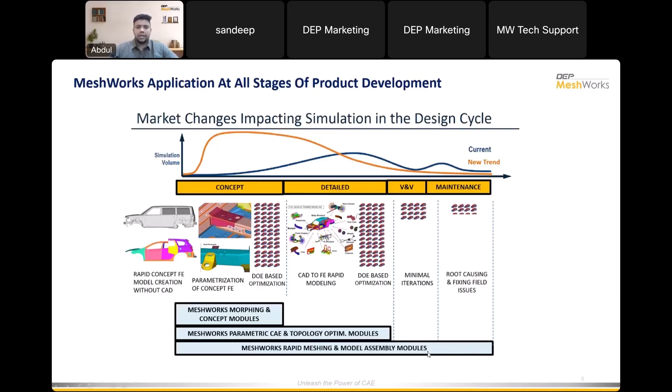This webinar has already been detailed in a past webinar about meshing and modeling activities, which you can see on our YouTube channel as well.

For today's main live demonstration, we'll show how one can achieve shape parameterization, bead parameterization, bulkhead parameterization, and doubler, rib, weld, and parametric optimization success stories, etc. All of this can be achieved with our fast design iterations.

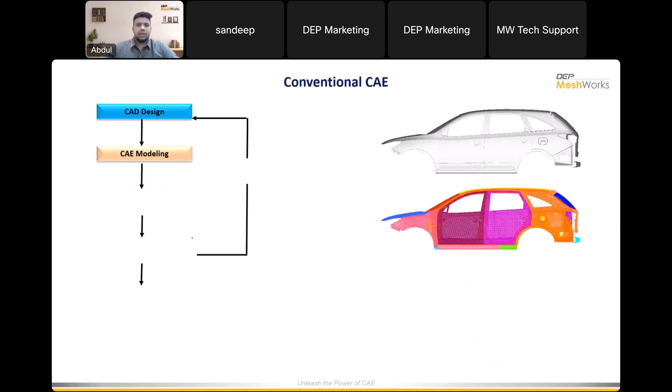With the conventional CAE approach, whatever you see in the market, one develops the design starting from the CAD design, then does the CAE modeling. From there we go for the analysis, and if the targets are met, we freeze the design. If not, we again go to the CAD design, make all the changes, and execute this entire workflow one more time.

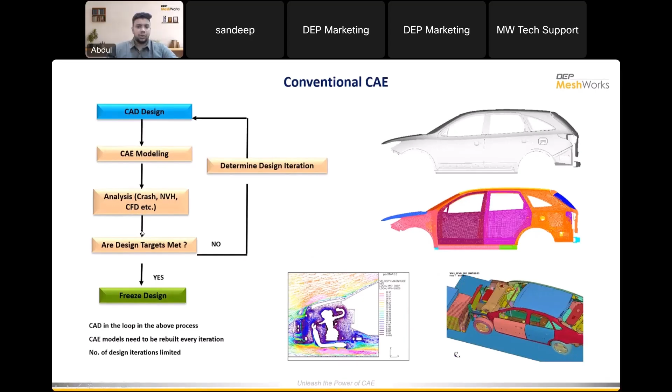But in the transformed CAE, or MeshWorks route, you can import your CAD model and do the meshing, etc. Instead, you can directly import our CAE model itself and do all the processes in the analysis stage.

If the design targets are not met, you can achieve the design targets by our parametric CAE approach and also DOE optimization approach. Not only do we do morphing and parameterization at the mesh level, we can also do CAD morphing level. So whether you have a CAD or a mesh, anything is fine, we can do that.

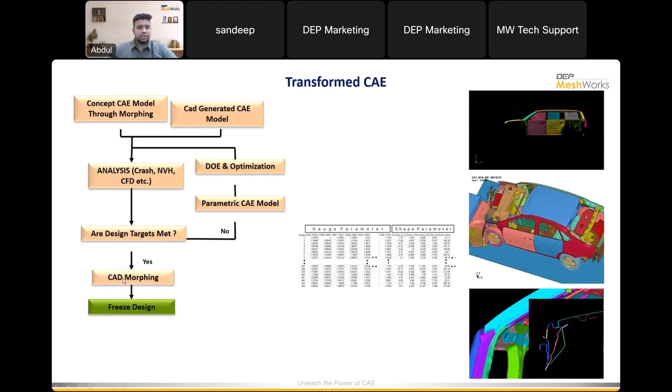One more advantage here is that whatever modification you do at the mesh level can be imposed directly into the CAD level as well. That is also one main criteria in our transformed CAE approach.

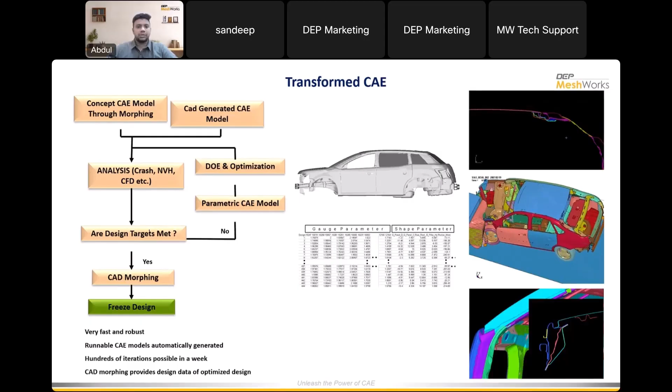So here the whole nine yards of meshing and modeling activities has been completely eliminated. And also with our new ROM capability, this kind of approach gives more hands for the user.

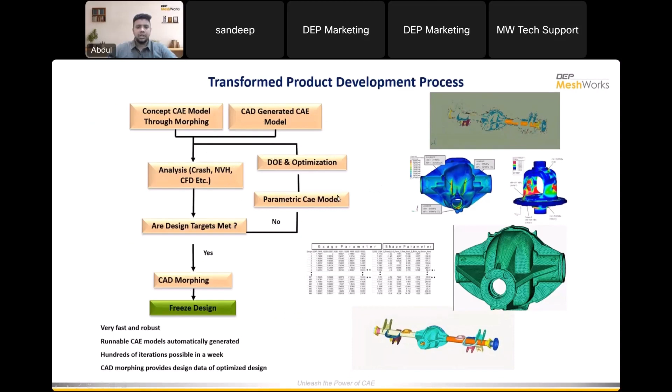We do that at an assembly level and also component level, or any sub-assembly level of optimization also, okay, with a similar approach.

In this kind of parameterization and optimization, one can achieve fast design iterations. These verticals of parameters can be obtained in MeshWorks, starting from shape parameters, where one can do any kind of shape modifications on the model or geometrical changes, and then we can play with the material and also the type of material and also the gauge, which is

the thickness of the model, and also weld as a parameter, where multiple numbers of welds can be reduced or increased, or the material of the welds, etc. can be parameterized, and adhesives as a parameter, and some feature parameters like beads, bulkheads, darts, etc.

That is also what you will be seeing in the live demo today, and also some special parameters like part extension, etc.

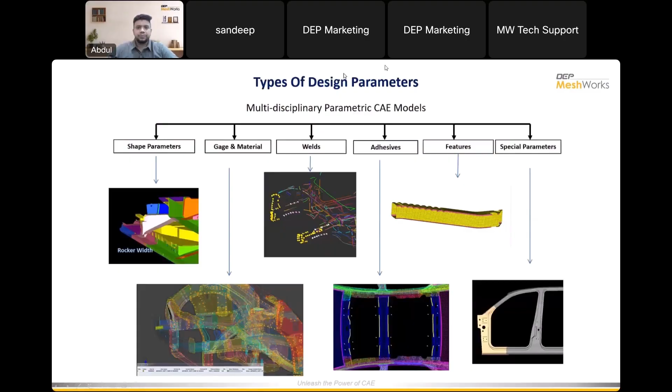Now we are going for the live demo. We are seeing shape parameters first. So in the parameterization panel, we have shape parameters, and in shape parameters we have multiple options.

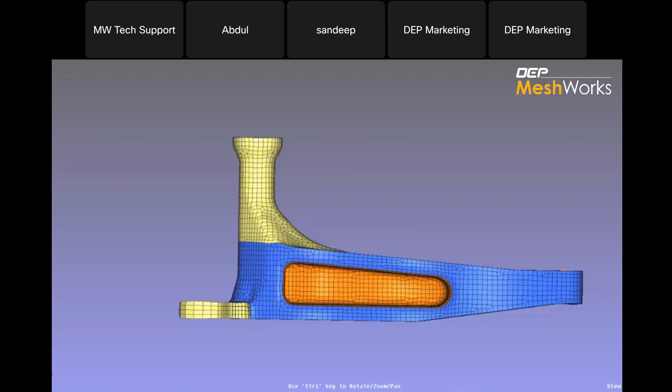So for a shape parameter, we need a morph setup. We'll create a morph setup first, for translate. I'll select this as my control nodes. And I have given two layers for deformation. And I have created a morph set.

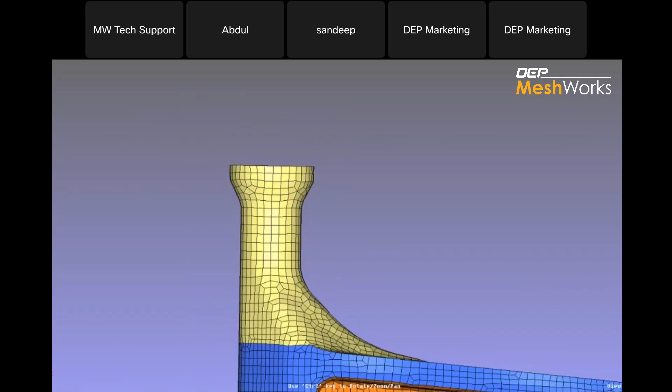Now I'll go for shape parameters, and translate. I'll select my morph setup here. I'll give direction as upwards, so we can move these elements in the upper direction. I'll set my value. I'll save this parameter here.

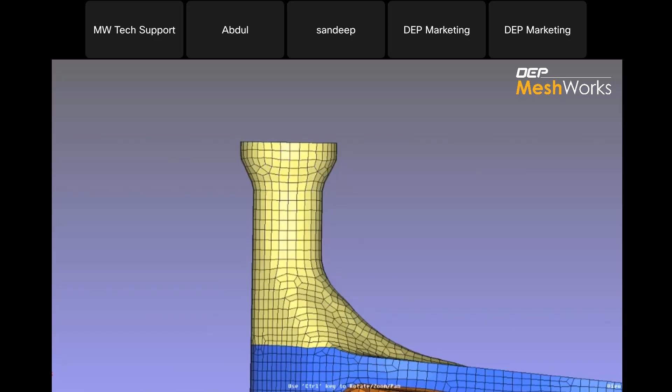So I'll go for review. You can see the translate parameter. Here I'm scrolling down, so it's decreasing, and I'm scrolling up, so it's increasing the length. You can see these features also have been captured. So in this way we can do the translate parameter in shape parameters.

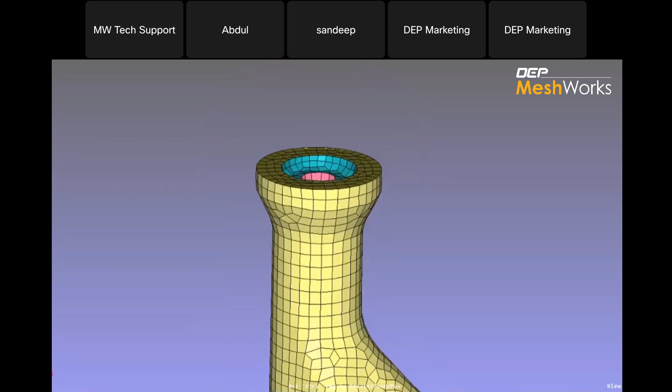Now we'll do one offset parameter. I'll create an offset for that.

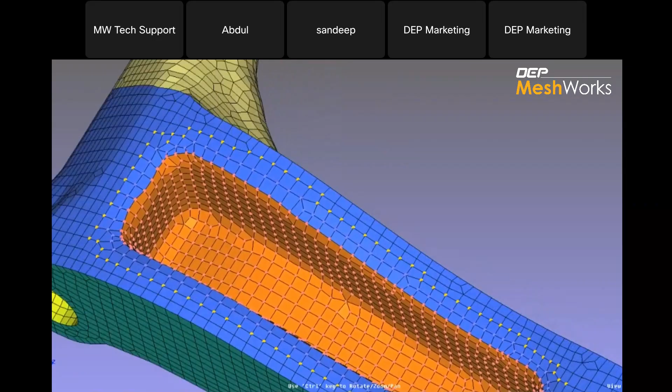So now I'll go for offset. Here you can see our offset parameter, how nicely it's offsetting the elements in this particular region. So in this way, one can create parameters by using MeshWorks in the shape parameters.

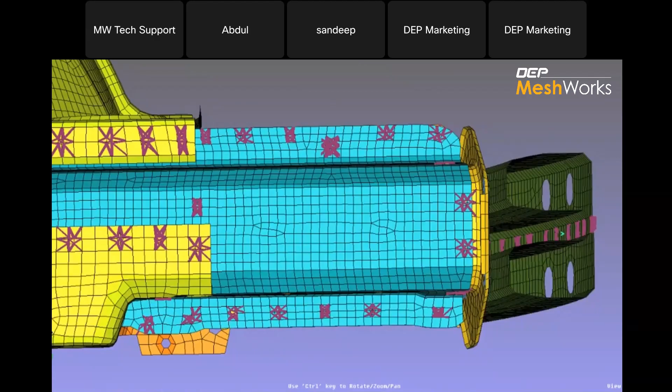Now we'll go for some of the feature parameters. In that we have multiple features. First we'll see bead, we have bead parameter here. We'll first select the component. We can create a bead as a new feature, and from an existing feature too.

We'll see new feature, so we'll select the base component. I'll select the length of the bead, and these are some bead inputs. Here we have bead type, 4 types here. And in dome type we have curve and linear.

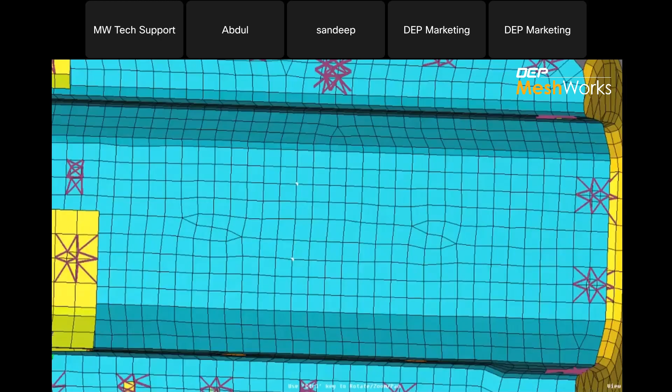So we can preview our bead, and I will click on accept. So we create beads for the stiffness of the component. If we want more stiffness, we can create parameters for these beads.

So in parameters, I will go for number of beads. And as it's in x-axis, I will take x-axis and the negative direction, so I can create my parameters in opposite direction. I'll go for a range of 100 or maybe 200.

I will define my bead parameters here. So after previewing, you can see we have got 3, as our range is more, it extended.

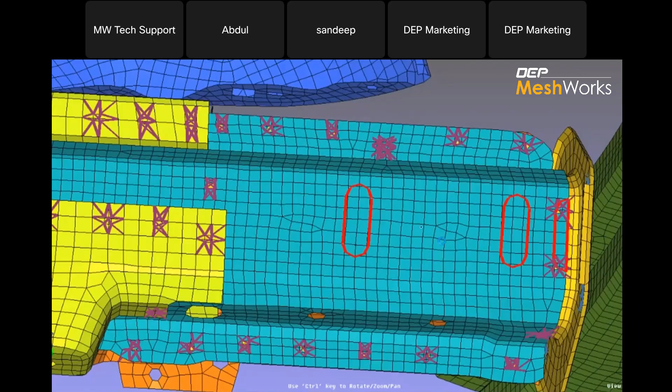So after preview beads, we can preview 3 beads here. In this way, you can save this and you can review that. You can review those here. I will take 2 beads, so you can see 2 beads here. Preview beads. So in this way, we can create beads.

And now we'll see another one, which is a bulkhead parameter. For creating bulkhead, I will select components, 3 components.

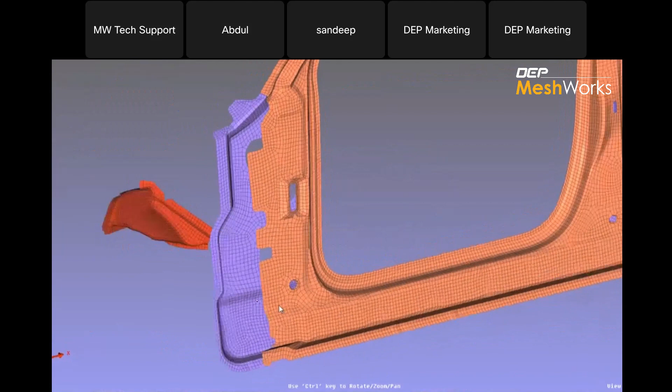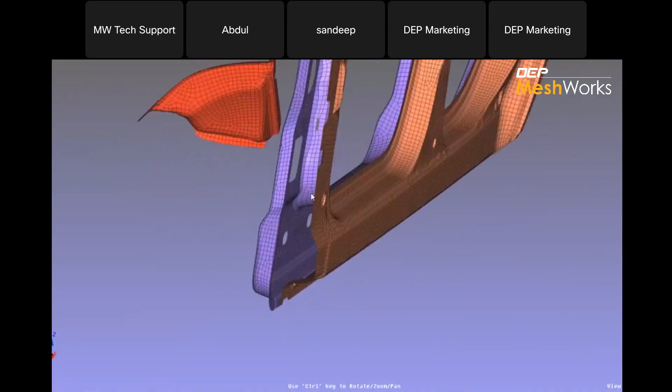So we have bulkhead parameter here. I'll go for create, specify geometry. For creating bulkhead, we have 2 types: between 2 channels and in a single channel. I want to have stiffness for these 2 channels, so I will create a bulkhead in between this. I'll select this as my upper channel and this as my lower, and I'll go for create plane.

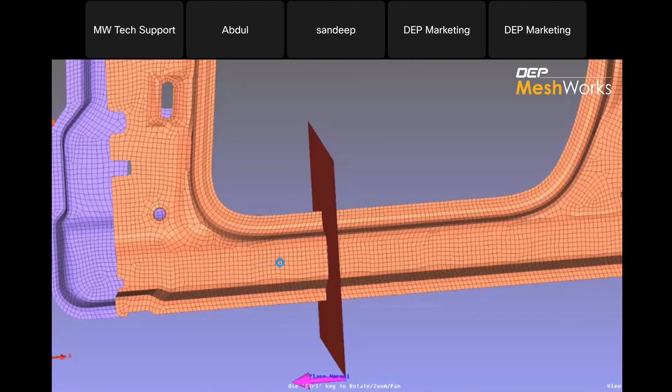I'll give the plane size and I have selected the center node. So now I'll click on create. You can see a bulkhead has been created here. And if you see here, we have connections also.

The connection at the upper channel is with spot weld and adhesives. The same way we have a connection for spot weld and adhesives for the lower channel also. Now I'll go for specify property. I'll select this component for the property of bulkhead. Accept, now I'll specify my connections.

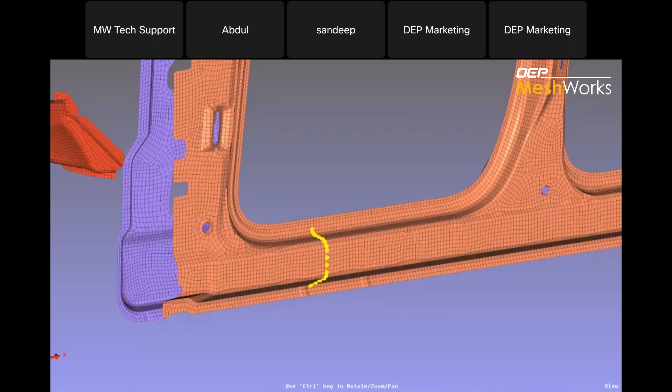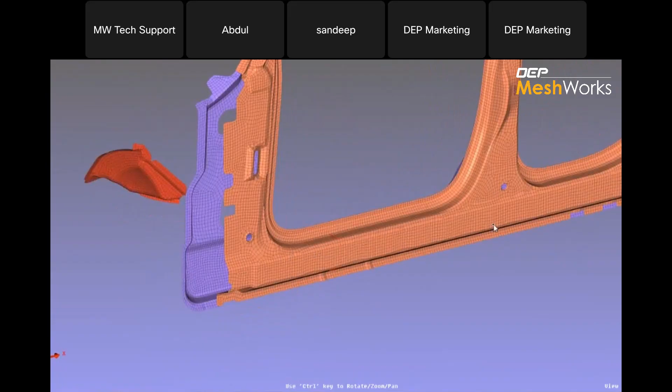And after previewing welds, we can see welds have been created here for that particular bulkhead. And I'll click on accept. If I want more bulkheads for more stiffness of this component, we can do the parameterization.

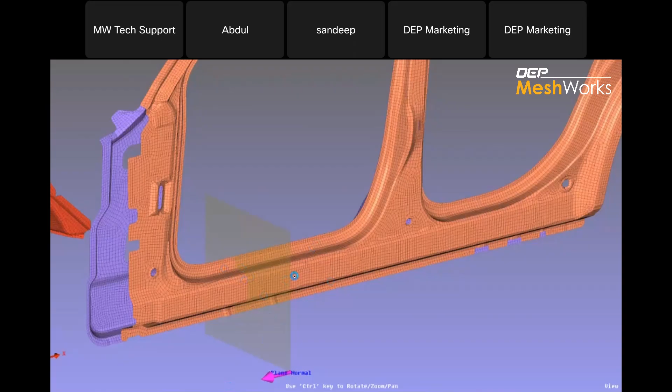So in parameters, I will go for number of bulkheads. I want 2, so I will give 1 to 2 max and current to 2. After clicking on preview geometry, we will get 2 bulkheads here. So you can see we got 2 bulkheads with a range of 100 mm distance.

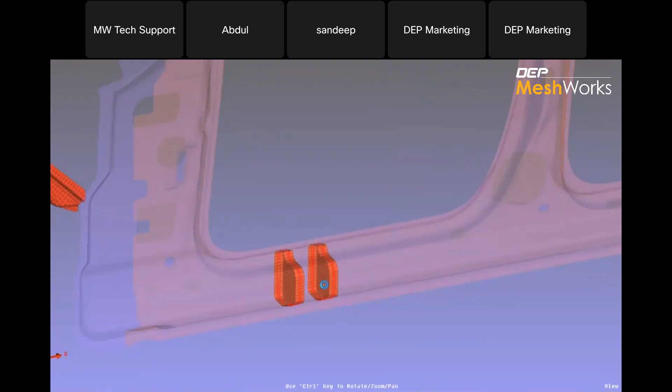So if you want, you can change the direction of bulkheads also. After clicking on preview with connections, we'll get connections for these bulkheads with welds. So you can see here we got connections. So you can save this, and in the same manner you can review those also here.

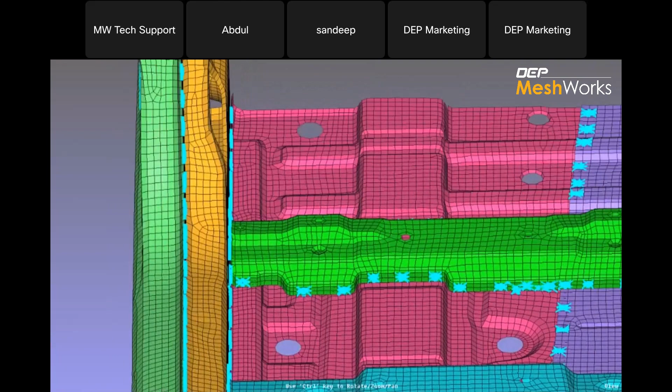So now we'll see one of our feature parameters, which is the doubler parameter here. Doubler also we'll use for stiffness, it's just like a bulkhead. I'll create a doubler here for this particular component. As I have selected the elements, I will restore them, and I'll create a plane.

So my plane has been created here. Now we have create doubler in 2 types: along master normal and reverse master normal, and these are the doubler inputs. And here we have weld line inputs also.

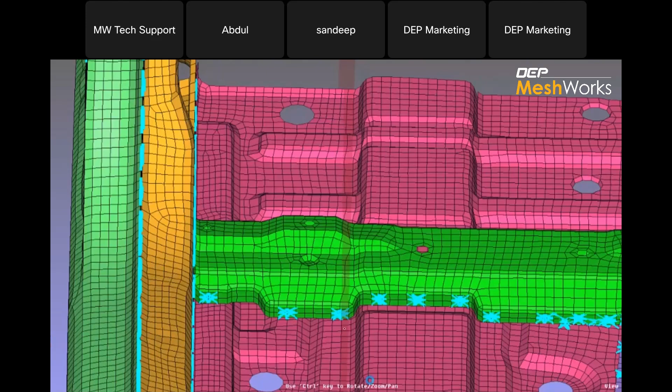For creating weld lines we have 2 methods, and I will click on preview. Now you can see our doubler has been previewed here, and I will click on accept. Doubler geometry created. Now I'll specify the property for this doubler.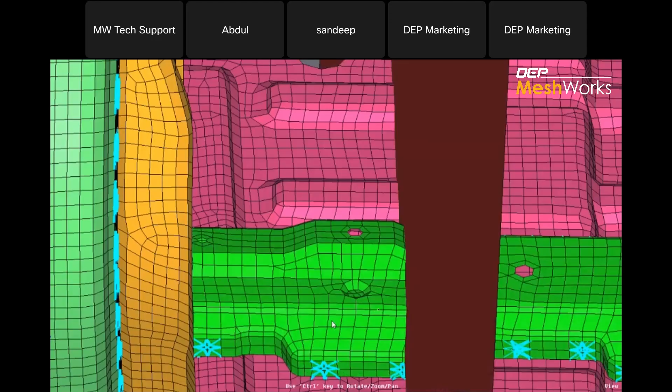I'll select this component. Now I'll specify the connections. I'll go for in spot welds, we have 4 types. We have seen in bulkhead also. So I'll go with at co-created lines.

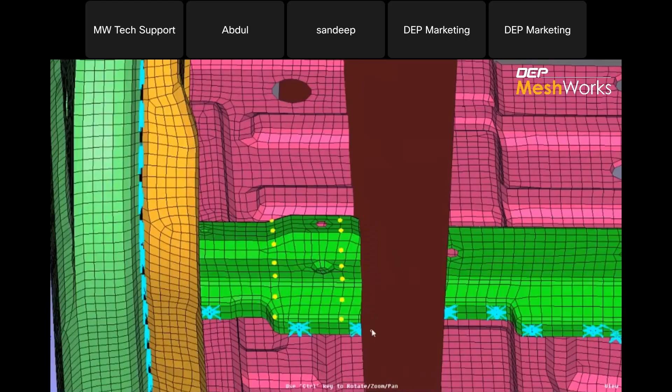I will select this as my connecting part and I'll click on preview. It says one component specified as connecting parts. You can see our weld points here, and after clicking on preview welds we got our welds here. I'll click on accept. So we have created one doubler with welds.

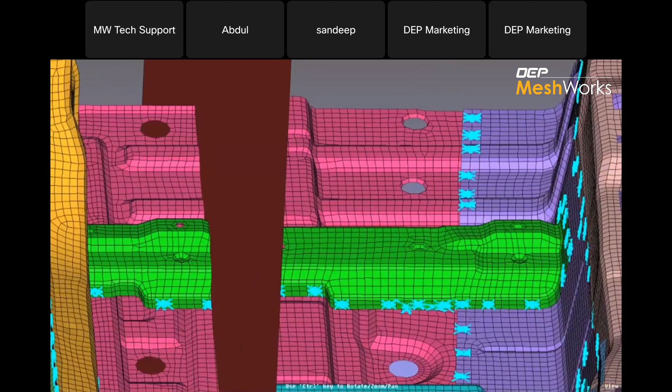Now if I want more stiffness for this component and more number of doublers, I will create a parameterization for that. I'll go for number of doublers and the range of 300.

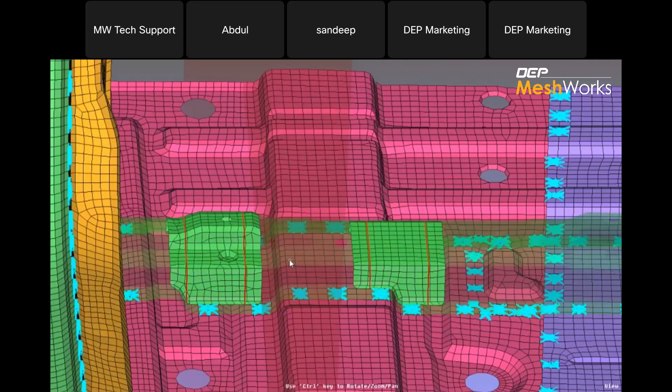If I give positive, it will come in this direction. I will give negative, so I can get a doubler here. I want 2 doublers, go for negative. So you can see we got 2 doublers with connections.

You can save this and you can review this here in review panel. So in this way we can create number of doublers for our stiffness.

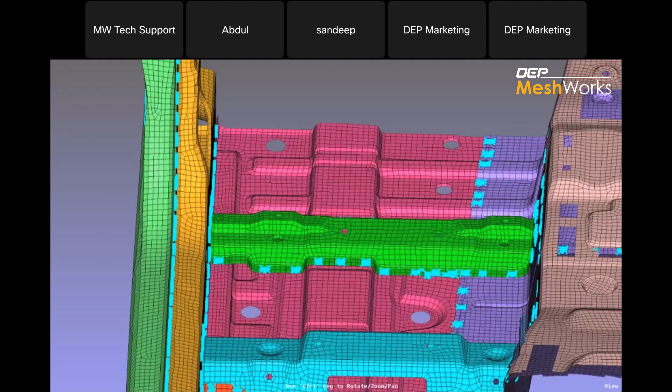Now we will see our tet rib parameter for the solid ones. So in parameterization we have a tet rib parameter. For creating tet rib we need a 2D component. So I have internally created this 2D component by taking face of this solid one.

So I'll select my 2D and I need to define my plane where I need to create my tet rib. I'll select my plane and I need to select a center node. So our plane has been created here.

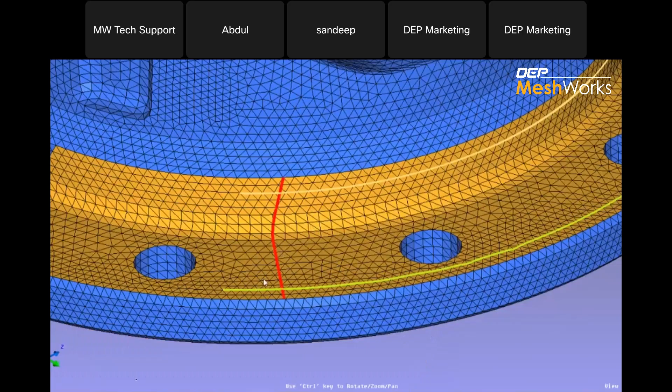So I need to select the trajectory, in which direction our tet rib should generate. I'll select my trajectory. I'll sketch my array by selecting my endpoints. As we have entered 4 here, we got 4 intermediate points.

You can modify this curve by just clicking on those points. Accept.

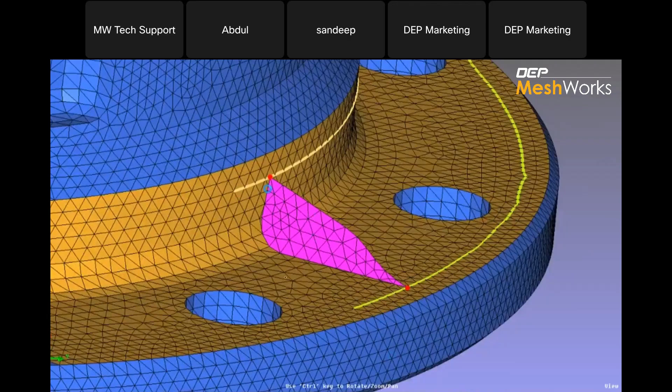As we need a solid tet rib, I have checked on this convert to solid rib, and user can create a fillet too. So I'll click on preview rib profile. Now we got a 2D rib profile here, and when I click on tet rib preview tet rib, we'll get a 3D tet rib here with the fillet.

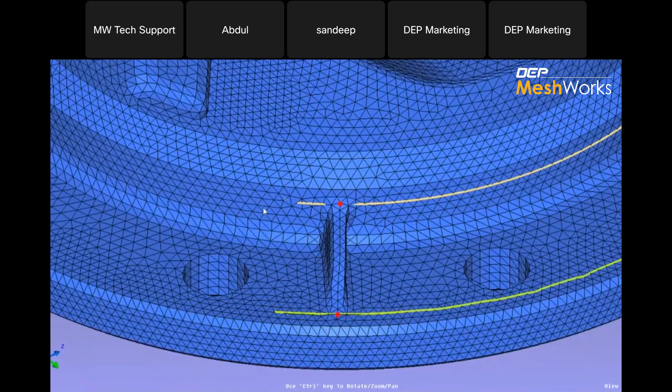And if user wants to remesh the fillet, he can remesh the fillet by using remesh fillet option here. So you can see here we got a tetrip with this property of the base component, and I will click on accept.

So if I want more tetrips in this circular path, I'll go for parameterization. In here we have pattern methods, 3 pattern methods. As it's a circular one, I will go for circular.

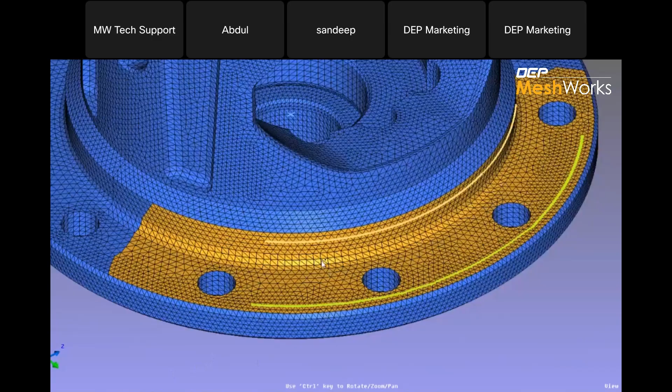And we need to specify a center. I have a center node here for the circular path. I'll click on that and I have defined my pitch value 36. It's an angle of tetrip.

So I need 2 tetrips. I'll click on preview rib profile. So the same way we have got 2 rib profiles here.

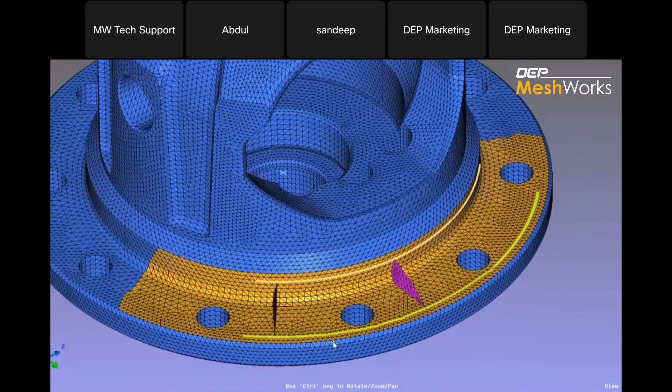If I go for 3, we'll get 3 ribs here. So you can see we got 3 ribs, and after clicking on preview ribs we'll get 3 tetrips here.

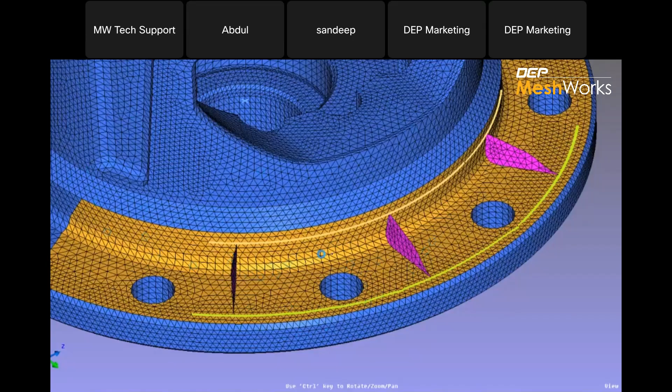So user can create a tetrip for the whole component in a circular way by using this tetrip parameter. Here you can see we got 3 tetrips as we have mentioned 3 as maximum, and you can save this,

and in the same manner we can review this one. If I click a 2 here, we'll get 2 ribs, and if we click on 3, we'll get a 3.

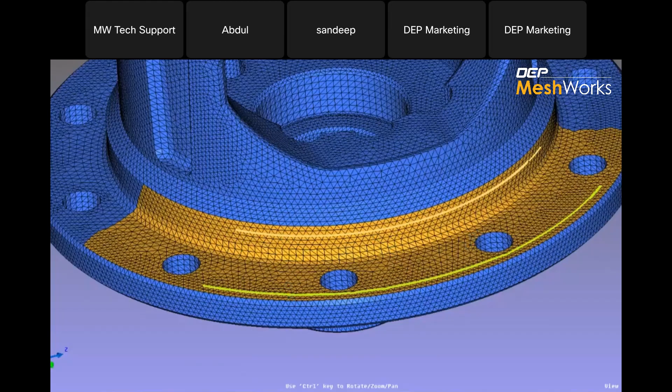So now we'll see one of our parameters, which is a weld parameter. Here we have weld lines here. So we'll create a weld parameter on this. We'll go for weld parameter.

I'll select these weld lines, and here we can repitch. We have repitch options here, so we can use pitch percentage, pitch absolute value, number of welds and all. So I'll go for number of welds. My minimum will be 5 and my maximum will be 75 welds for this particular lines.

So I will give parameter name as weld, and I'll click on accept. So if user wants the diameter, he can change the diameter. We have 3 options here.

And if the user wants heat affected zones, he can click on this. Now we'll review our weld parameter.

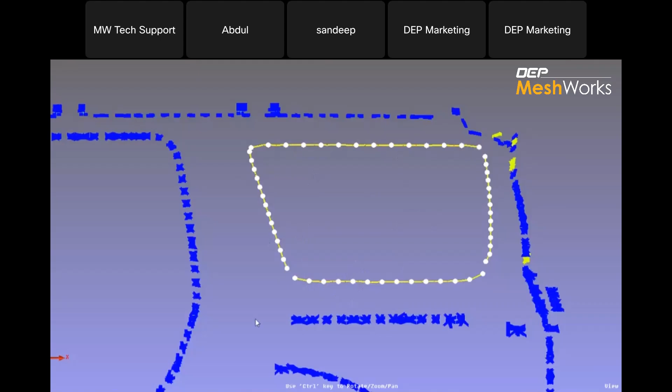Here you can see increment we can give as 5, 8, or 10. Now I have given increment as 5, and you can see our welds have increased. And if I click on negative, it's reducing. So in this way, we can increase and decrease the welds by using parameterization from the maximum and minimum inputs we have given.

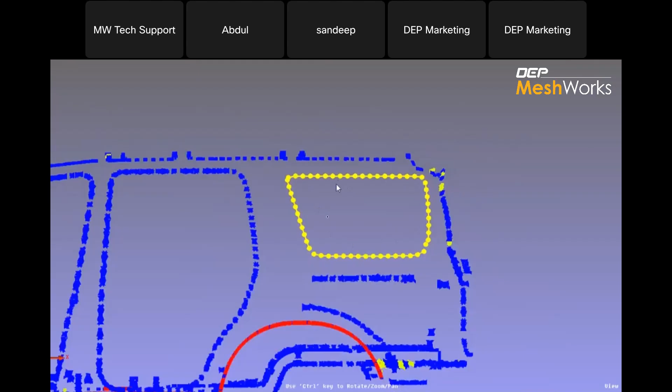So in this way, we can use parameterization in MeshWorks for creating multiple parameters. So now I'll hand over this test to Abdul.

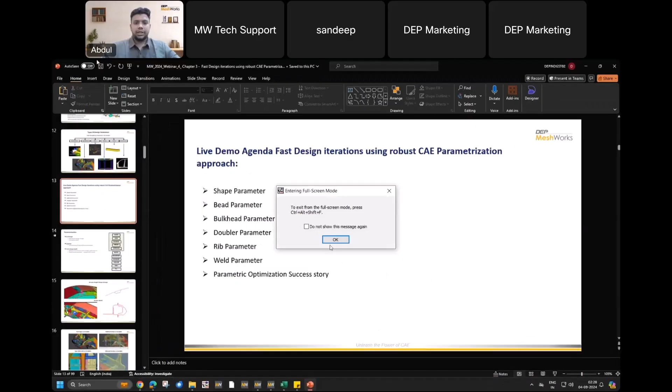So you have all seen the live demos for our fast design iterations with our CAE parameterization techniques, for each and every functionality of shape parameterization, be it bead, bulkhead, doubler, rib, weld, etc. So with these, one can parameterize the model, and I also have some success stories to share.

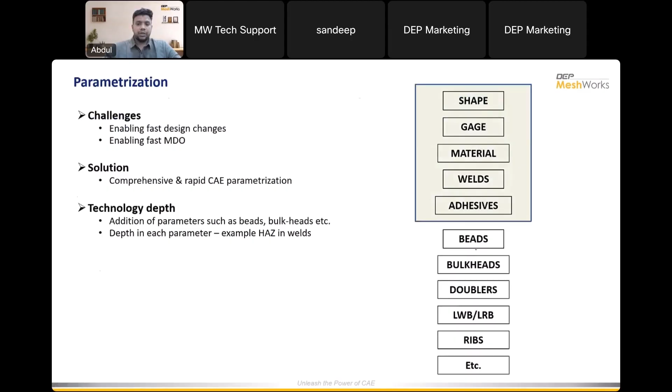With parameterization, as we all know, one can parameterize the shape. But in MeshWorks, we can also do this with thickness, materials, welds, adhesives, etc. Apart from that, some very unique functionality is our design enabler functionalities, where we address beads, bulkheads, doublers, etc.

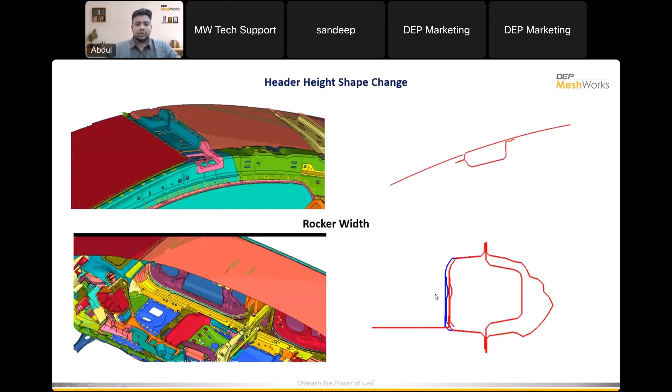And from there, as you have seen, our shape parameterization parameterizes the entire model with this kind of minimum and maximum criteria, with header height change, rocker width, or any kind of model cut and stitch, and do the parameterization in some of the local portions or at the assembly level. So the possibilities are numerous, especially when it comes to thickness, material, and welds.

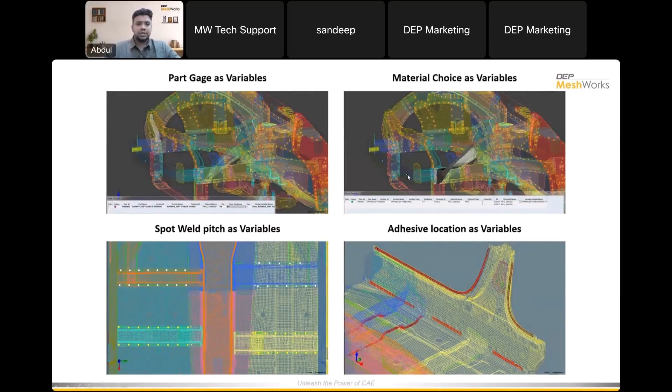These are all very unique ways of doing parameterization in the CAE world, and I would also like to touch on the extensiveness of design enablers, starting from bulkhead. When you create a bulkhead as a stiffener, either for side impact or some other stiffener component, if you want to increase the material strength, you can include the bulkhead.

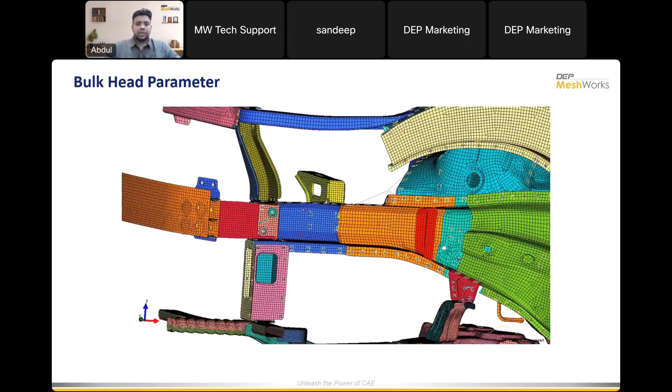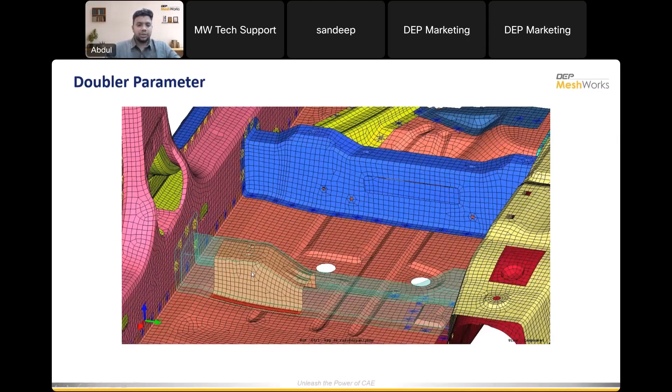So these cross members, if we wanted to strengthen them with doublers, we can do the length as a parameter, or number of doublers also as a parameter. That much variation we can do with the parameterization technique.

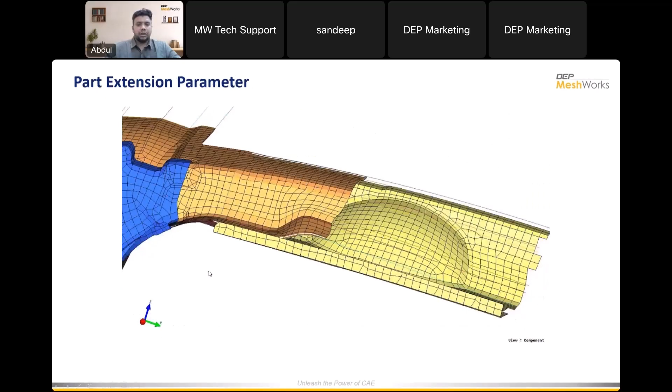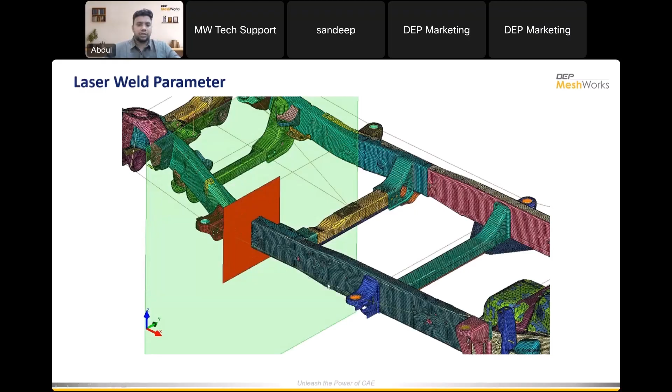And also we do everything with connections, and with all this, some unique parameterization like part extension parameter and part contraction parameter. And if you want to reduce weight in the model, we have our punch hole parameter and Tailor welded blanks, like our laser welding parameters for different material fusions throughout the geometry on the load path members.

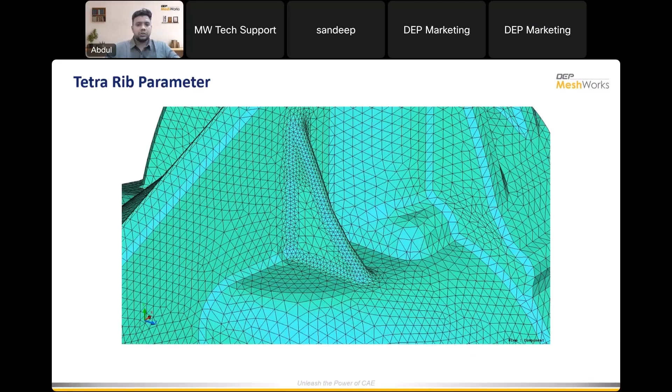And also, not only in sheet metals, but we also have it in tetra models, the rib parameterization, which I also showed, and some topology parameter which you haven't seen in the demo, which lets you relocate an existing member to a different location with all the existing welds, and the shape deforms based on the new location as well.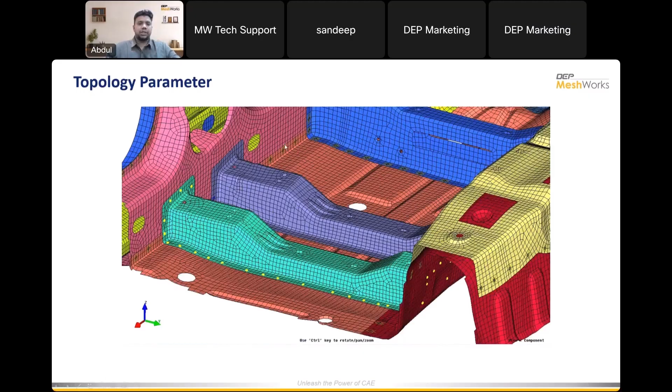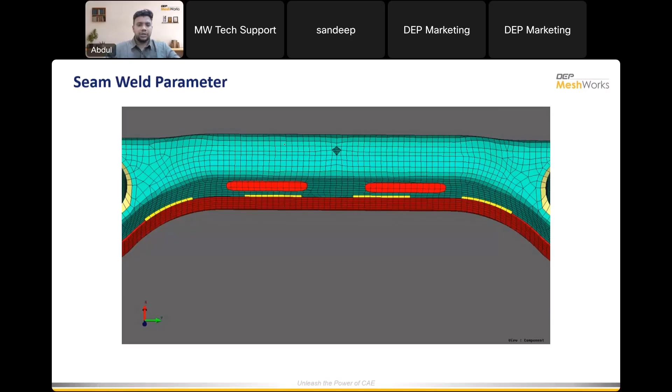And rib parameterization at the shell level, and also welds as parameters, like number of welds in particular gaps, and length as a parameter, etc. So these are all the parameterization capabilities in MeshWorks.

One can impose these parameters in one model, and also replicate the same into all the different verticals. Like if the user has an Abaqus model and has all these parameters ready, he can impose those parameters into Crash, NVH, and CFD in MeshWorks.

So with MeshWorks, one can optimize different verticals of models with various numbers of design iterations by just generating multiple designs across each domain. And from there, we do our optimization technique with the help of an optimizer.

So when we create an input-output matrix table, we just send it to the optimizer, like Isight or modeFRONTIER, etc. And from there we get our optimized design with the response of that calculation. So this is how we do our MDO with this approach.

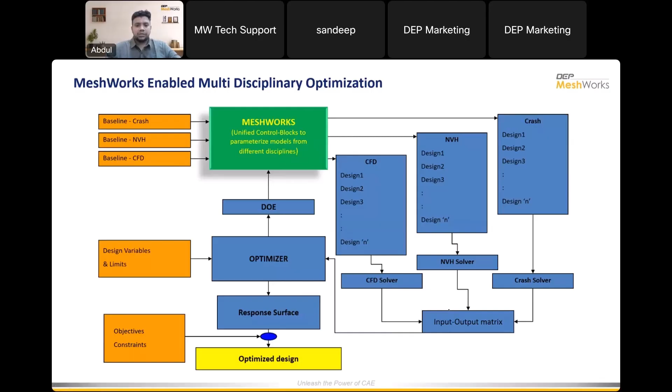With the help of MDO technique and parameterization technique, we have achieved a lot of success stories, which we wanted to showcase in today's session.

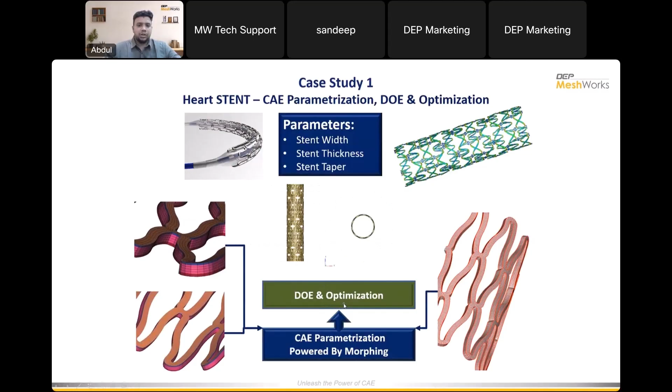Case study one is on the stent model, a cardiovascular stent, which is at a very micron level. We have done an extensive DOE optimization on this model with stent thickness and taper, etc. The model setup has been reduced from weeks to days, with hundreds of design alternatives, wide varieties of possibility, and a quality and robust way of simulation. So we have optimized results for this stent model.

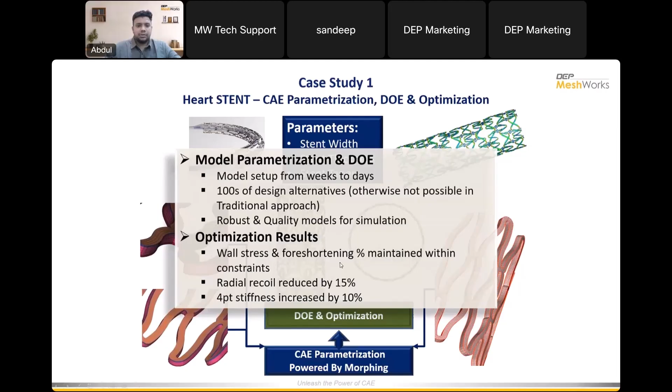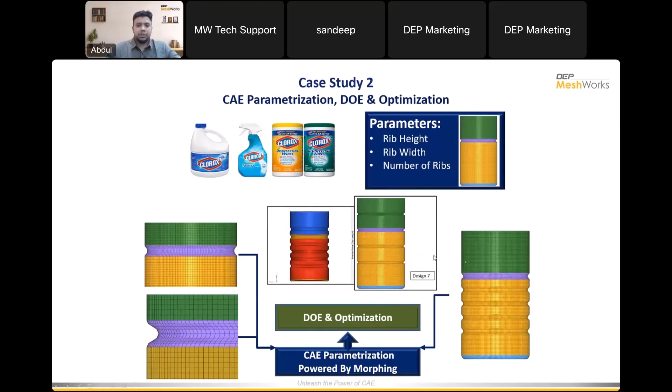For case study two, on multiple parts stacking in the logistics industry, we included bottle optimization, addressing how one can stack up multiple parts one by one, so that the bottom one needs more strength compared to the top. This is all addressed with loading capacity optimization. With that, the top load capacity has been increased by 20% more than usual loading capacity. That is one of the success stories.

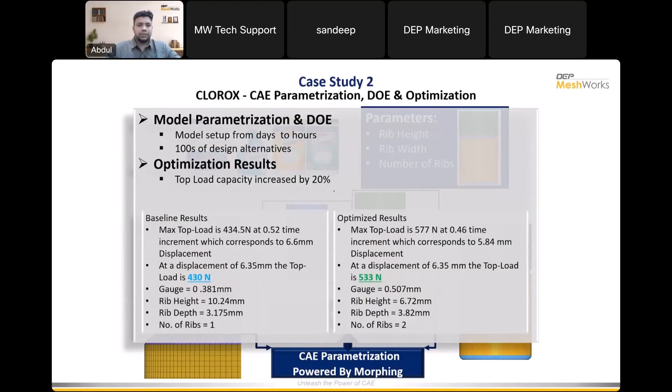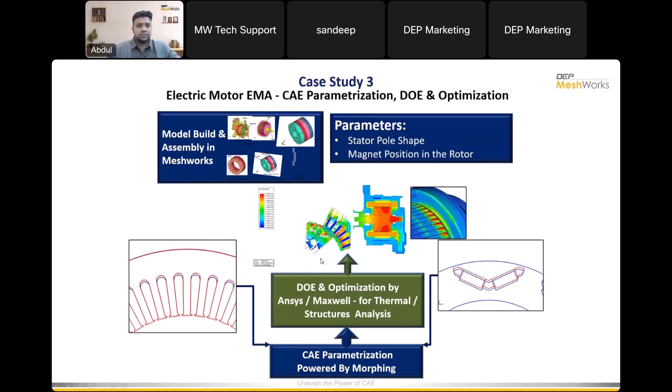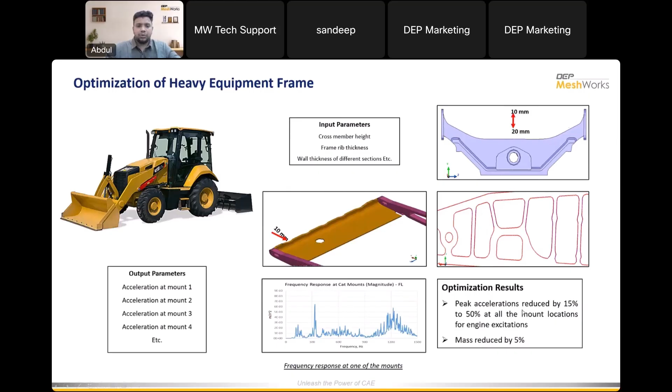One more optimization success story is on a particular mount of a heavy industry frame, where we reduced 10mm to 20mm variations across shape parameters and width of cross-sectional profiles. It performs the same, but we increase performance and also reduce weight, so overall mass reduction has been achieved to 5% in this model.

This is one of the success stories for a small car development in a US program, where the baseline structure is 233 kgs in DEP. With design changes and our parametric capabilities, we decreased a lot of weight, which is a great achievement, from 233 to 175 kgs, a 25% weight reduction in the model, which is very huge in the automotive industry.

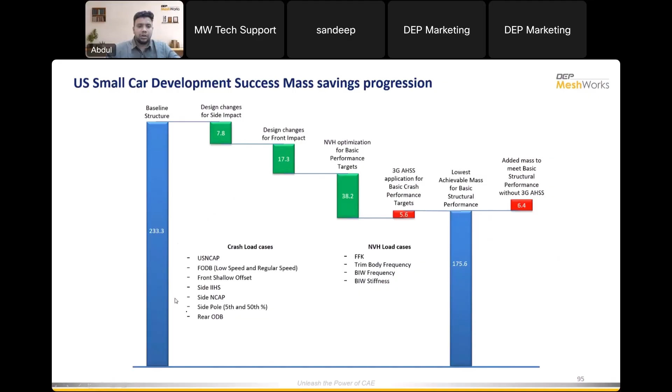And this was done while considering all crash load cases and NVH load cases into the picture.

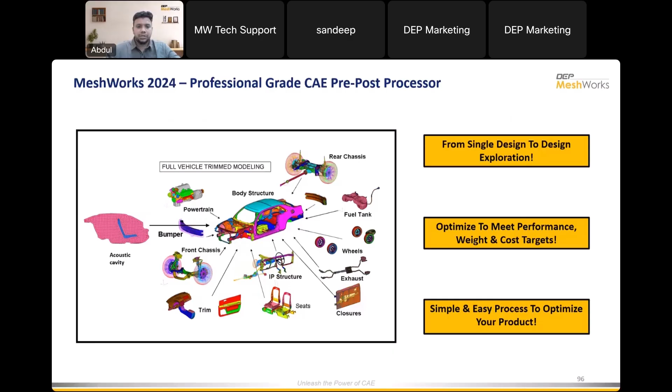Overall, as a CAE pre and post processor, when it comes to fast design iterations using our parametric approach, one can do multiple design explorations with a single design, meeting performance with weight and cost reductions as targets. It is a very easy and effective way of doing optimization, a proven approach.

At last, overall, as MeshWorks, I wanted to conclude this session with our 4 verticals of domains, where we transform all the CAE and CAD domains of workflows, and accelerate the CAE processes into multiple new inventions.

With ROM module as an example, with multidisciplinary optimization included into it, which saves a lot of time and cost, we innovate a new module, our eMod technology, which has been integrated into MeshWorks recently.

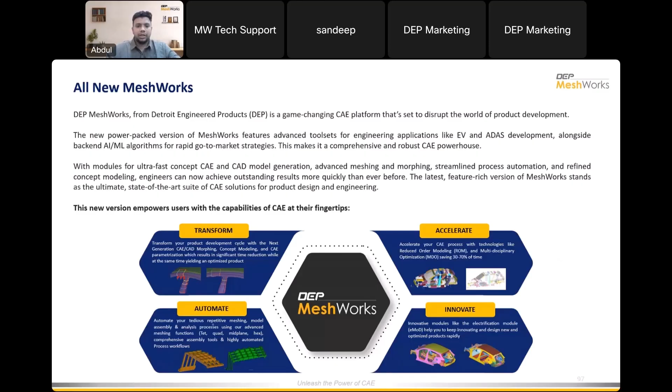And at last, with our automated capability, one can automate multiple numerous workflows, which has been made available and set as a standard with our OEMs. So it can be completely automated, and some of the automations have already been set ready and integrated into MeshWorks as well.